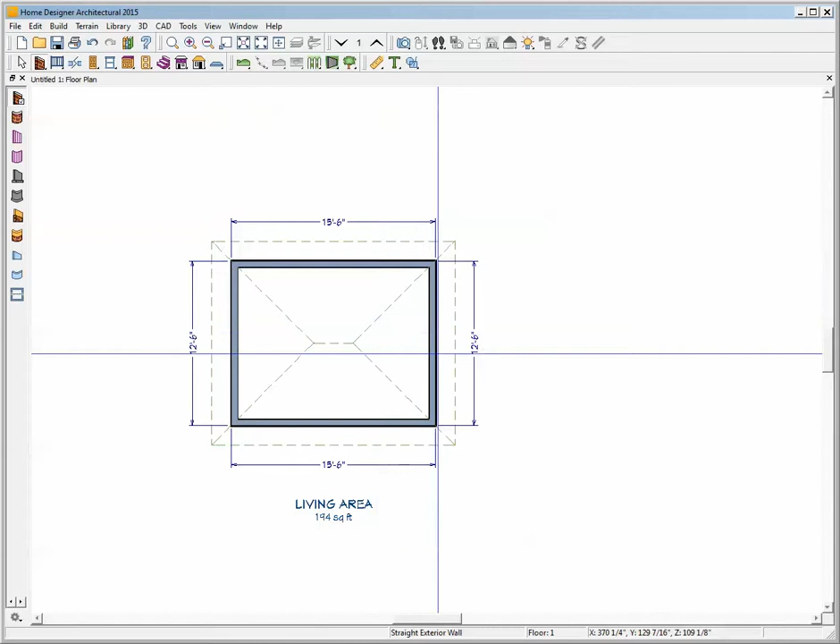Let's extend this over, and I'm going to put an interior wall.

Let's see, is that offset? I don't think it was. It's a little offset, and the garage is sticking out there. Okay, I see it. So we need to break this wall and bring it back for that offset.

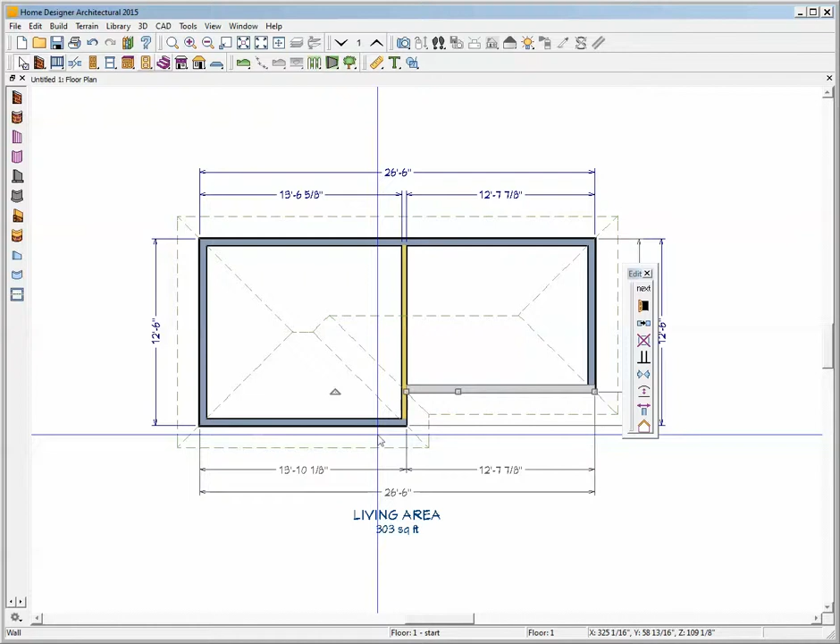And we need to put an exterior wall. I need to draw over that. There we go, that's better.

Okay, so over here we're going to call that garage. Garage.

And it's got a full gable wall. Right here I want a gable, actually probably front and back. Although it probably, for this exercise, doesn't matter. Anyway, I'm going to break this wall back here and then take these two segments and open them up. Okay, one at a time.

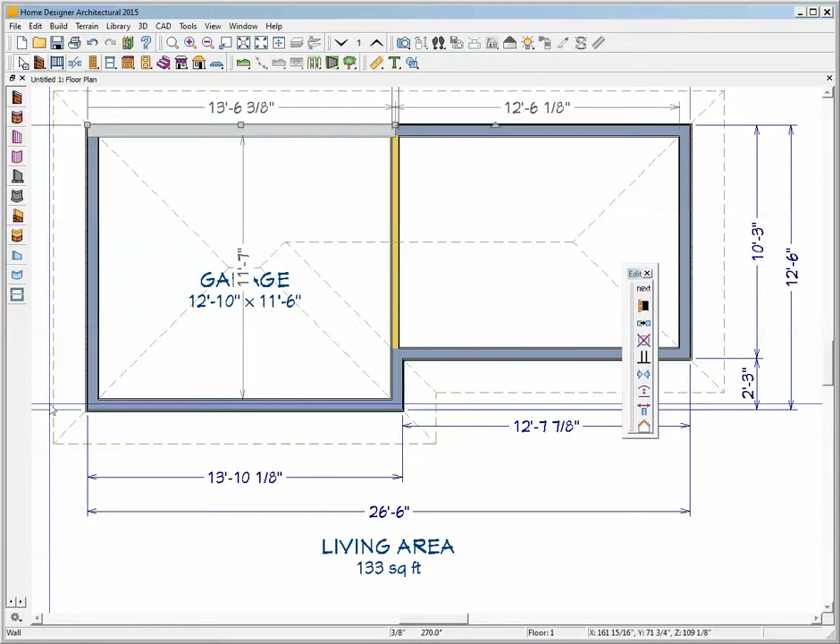There it is. Okay, we'll go to roof and tell that wall to have a full gable over it. We'll do the same thing to the front. Open that dialog box for this one, do the same action, full gable. Okay, and the software dutifully has created a gable roof there.

Now this part looks like it has a second floor, I recall. Let me check it again. Yeah, there's a second floor, and it looks like the second floor is not over the garage.

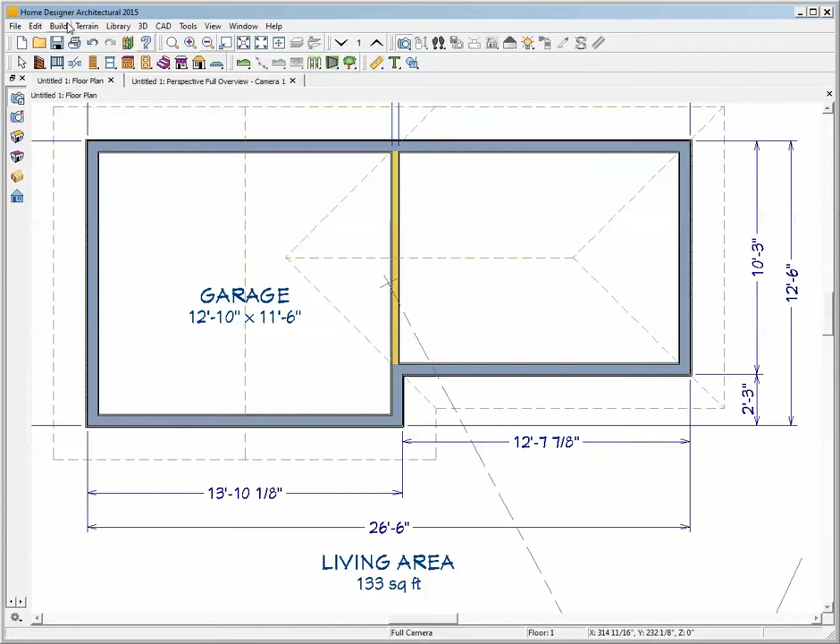So we'll go over here and build floor, build new floor, make a blank, because I don't want a floor everywhere there's a first floor. And I don't care, you didn't say what the ceiling heights are, so I'm not going to worry about that.

We'll turn on the reference display, under tools, reference floors. So there's the first floor I want to create a floor over. So we'll draw a floor over that with an exterior wall.

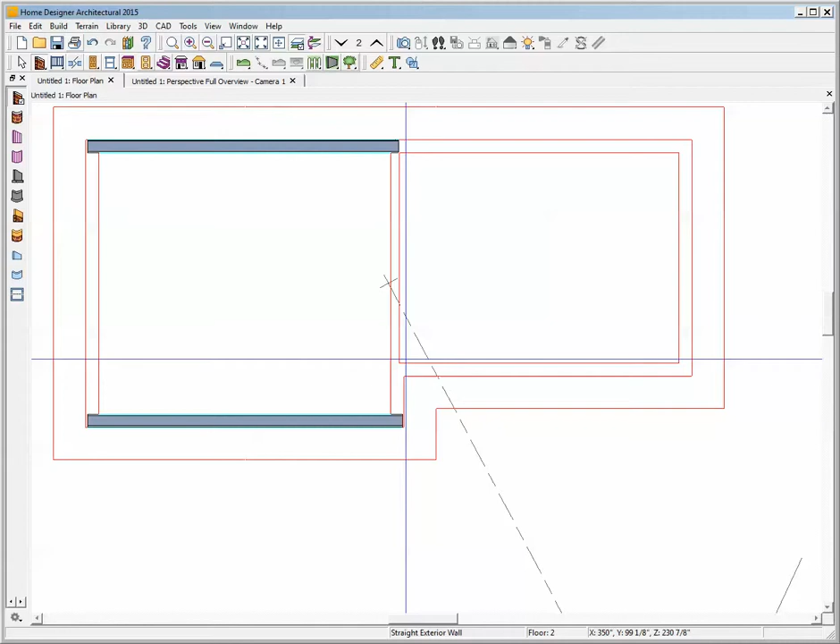I'm going to try to keep this relatively simple. Now this wall doesn't line up with the wall below. I want that to line up. There we go, there's that line up command.

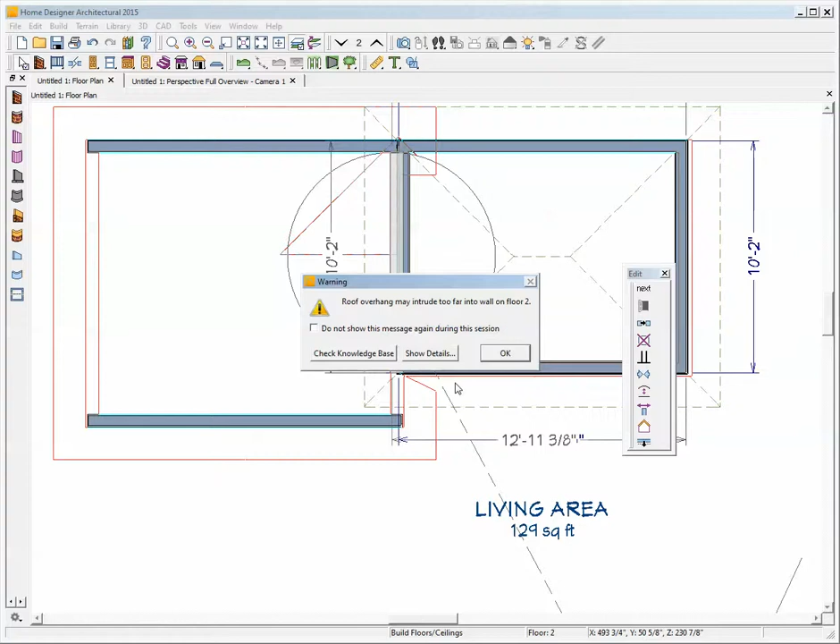Okay, that's what we have so far. And I'm going to put a garage door over there.

Okay, now we're ready for the port lines. Those windows went in cattywampus, didn't they? What's wrong with that thing? Open up. Floor to top 49 7/8. That's a goofy figure. What's this one?

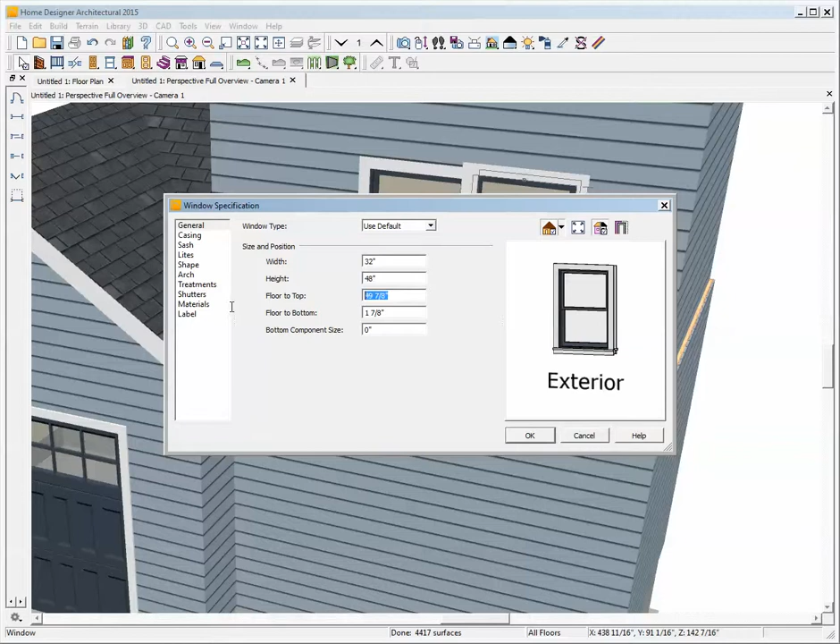We'll just make them both 50. I'm not particularly concerned about that, but I don't like them out of alignment like that. It's the way I am.

Get over it. Okay, now I'm going to hit Shift F6 to do that, so I can work in plan view and you can watch it develop over here. Hopefully it won't go all to pieces and I won't look like a fool, but that remains to be seen.

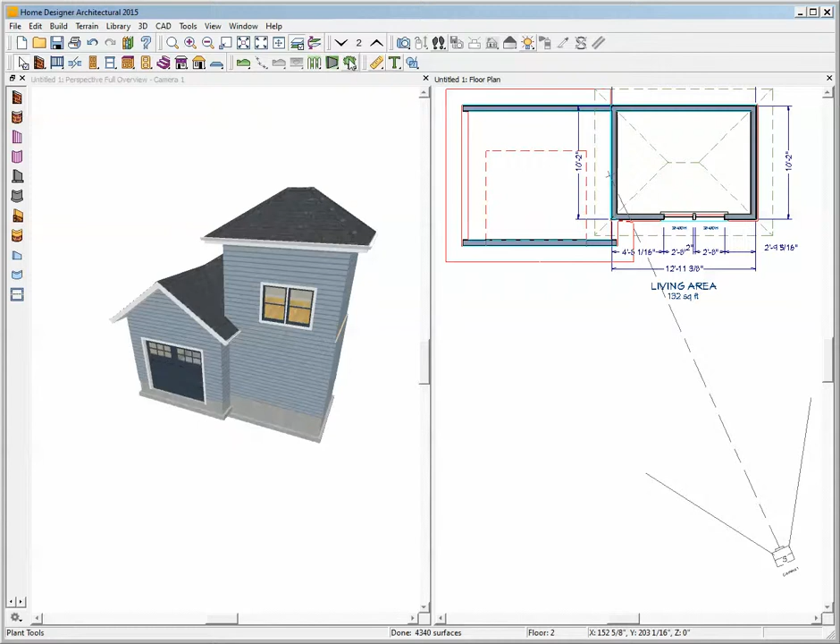I'm going to turn the reference display off and click on the plan view screen, zoom in. Now we're going to create the porch.

I'm going to go over here to the walls and I'm looking for railing walls. Just draw a railing wall there and there. There's our railing wall. So it automatically put a roof over it.

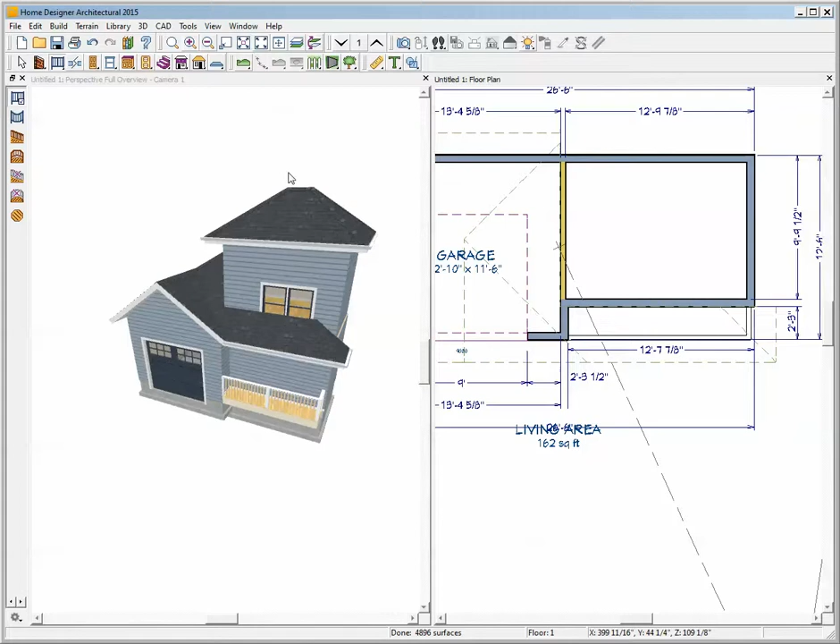Of course, it's not the roof I want, but I've got auto roofs on, so that's what it does. If I want this hip roof to go away, I'll have to tell this wall here, open this dialog box, go to the roof tab, and tell it to be a full gable wall. We'll do that and see what it does. And it makes it a shed roof.

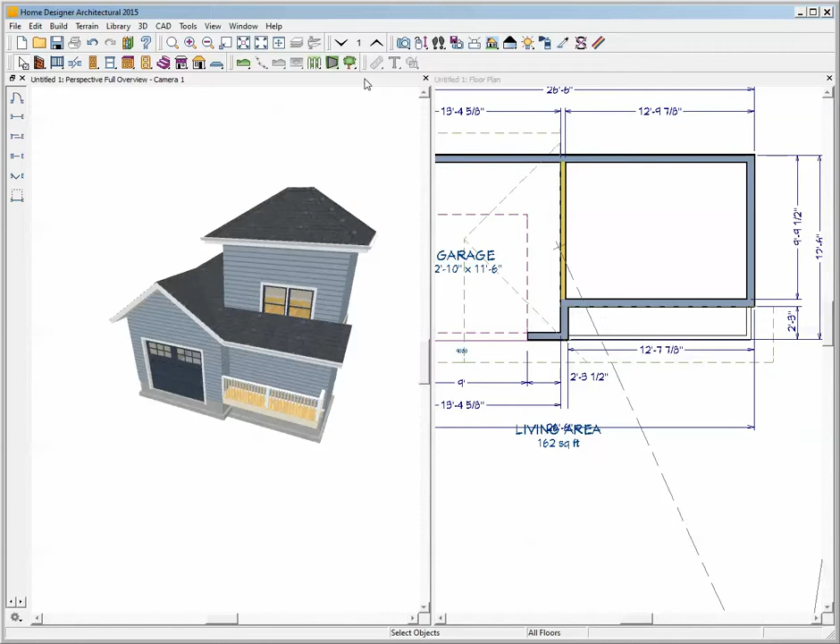Where's the turn thing? There it is. See, like that. Now I don't want this steeper roof. See how I was getting into the windows there? That's not okay. So I'm going to open this wall, not the dimension.

There we go, I got the wall now. We'll go into it, open it, go to the roof tab, and right here where it says pitch, and it says 8, I'm going to put in 3. Something not quite so steep.

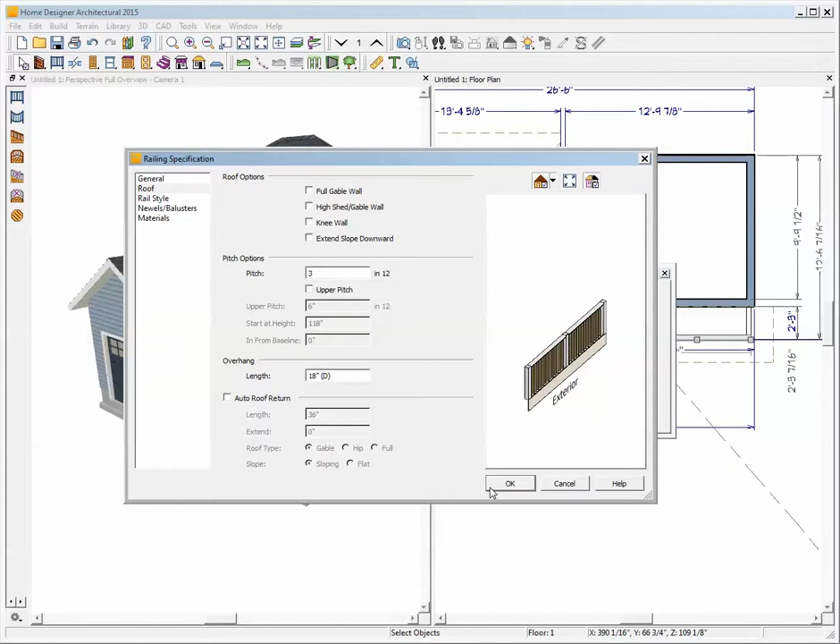And it's still a little bit low. We got a goofy overhang over here, but you're dealing with Home Designer Architectural software, and you're kind of limited. I can't just tell this overhang not to do that, what it's doing there.

But let's just make this... 3/12 is not quite working. Well, we'll just raise these windows up there. The windows are kind of low.

I think they're set at 50 inches. That ought to be set at 80 inches. For the top, 80. That'll probably solve that.

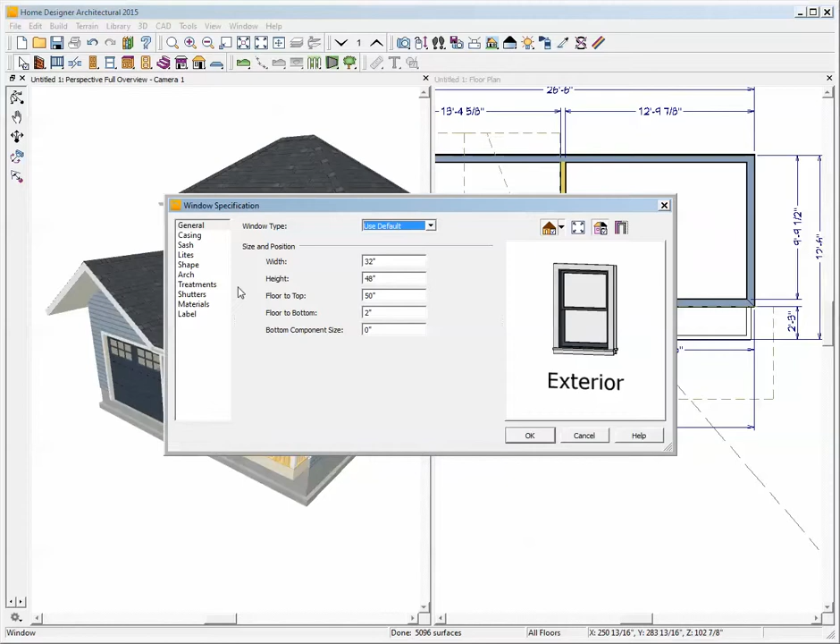Anyway, you want your shed roof underneath the windows above. You don't want them chopping them off. We could probably go a little steeper now that I've got those at a proper header height.

The windows, I mean. We can change that to 5/12. That'll shed snow and rain a little bit better. And that looks a little bit better with the garage also.

So that's a way how to do that. I guess we need a front door and a window.

Yeah, it looks better. Now, to cut through the railing, you use the door tool as well. I use the doorway tool. And then we'll just line that doorway up using the center tool on the front door, like that.

And if we want to hold up the roof, again, we go to this and reprogram the wall. This is normally not floating around like that. I'm sorry, that's usually down here somewhere. Yeah, like that. I let mine float sometimes.

Now we're going to open that bottom wall and reprogram the wall, so we'll have something there to hold up the roof. We'll go over to rail style and post to beam. And now we got posts to hold up the roof. That would be more structurally sound.

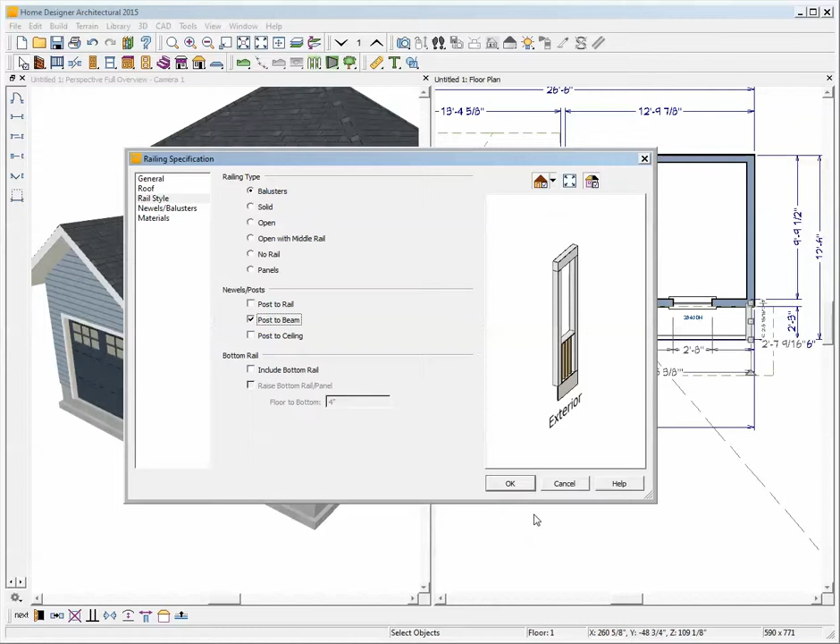I don't see it here. I guess architectural doesn't have that setting. I'm looking for... well, it's not there, so there's no point worrying about it. But anyway, that's a nice way to handle that, and that's within what the software can do.

One of the things a new person has to figure out is what the software will do easily and what it won't do easily, and then how can you wrangle and go ahead and get the effect you want anyway within the tools that it does have. Most things that you want to be able to do, you can do. This may not be exactly like the picture, but it's about as close as this software is going to be able to get to it.

Let's go back and check that. Yeah, I think there's a little bit of separation here. What I can do is raise the ceiling height in the garage and might maybe get a little separation there. But again, that's just a visual thing.

If I go into the garage and go over here to the structure tab and raise the ceiling to 12 feet, we'll get to... okay, you see we're beginning to get a little separation here.

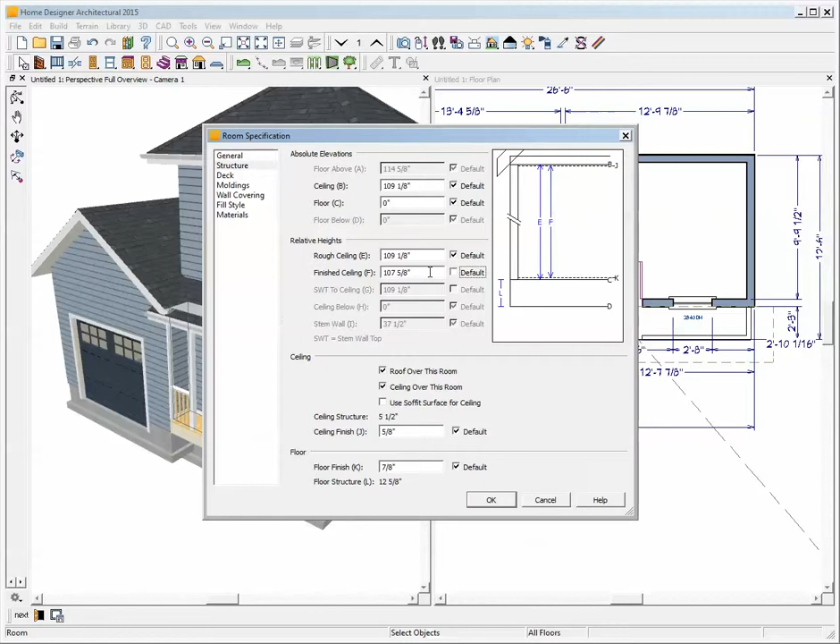Now on the front porch, what the ceiling... okay, I'm going to set this front porch finish ceiling to 8 feet. Get a little more separation there. Okay, you get the idea.

I got to answer the phone. This is David Potter, may I help you? Hi, I'm fine. Sure, sure.

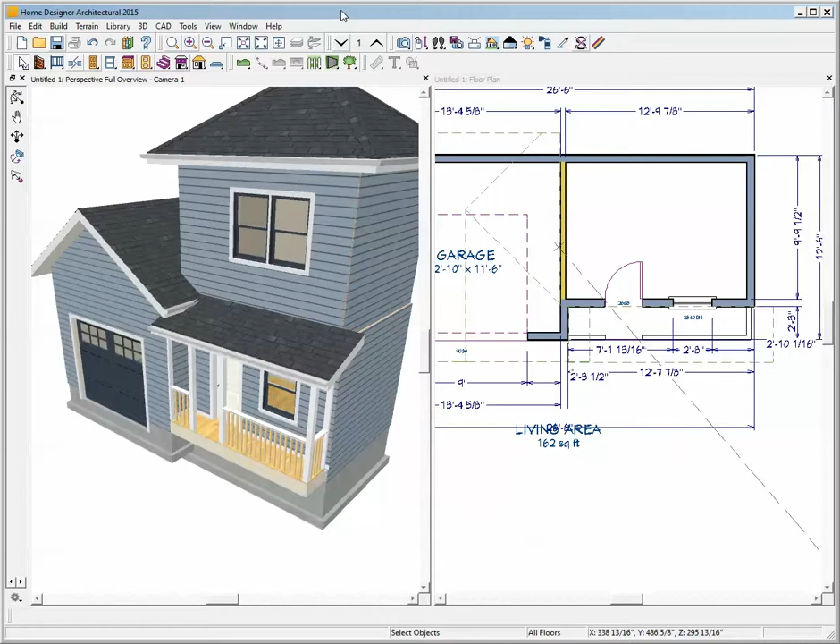Yeah, you can just hang on the phone and I can give you the... have you ever used GoToMeeting before? Okay. I was making a video tutorial. Let me stop that one. It was Control F10, I guess it's Shift.